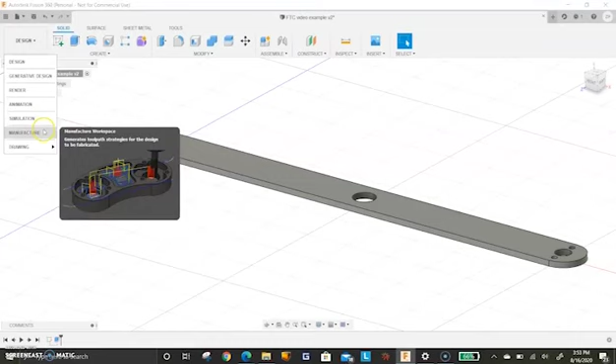Okay, so here in Fusion 360, I have this relatively simple part I've modeled up, and I want to make it on a CNC machine. So to do that, I will first go to Manufacture and add a setup. This setup is basically what contains what kind of machine you're using, the stock information, your work coordinate system, and what you're actually making, which is this model.

So for the work coordinate system, this is pretty important because this orients every operation in the same way that your CNC machine will see it. So for most CNC machines, Z is up, and Y and X can change between machines, but it doesn't usually. And so just keep those the same, and you can mess around if you feel like something's wrong.

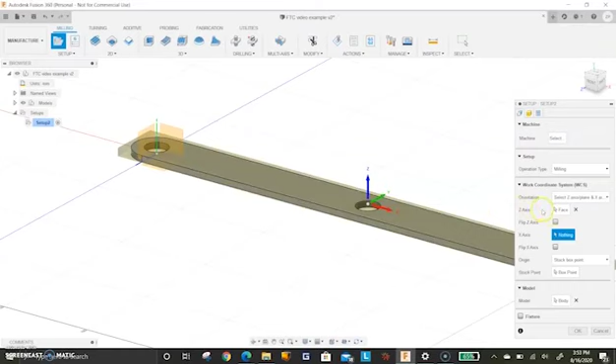And here in stock, you can set stock offsets, or you can change whether it's a cylinder, a relative box, or a fixed size. I like to use relative size for simple parts like this, and change the top offset to 0. And for the purposes of this video, I will turn the sides offset to just a little higher so we can see what's going on a little better, but I like to also keep that at 0.

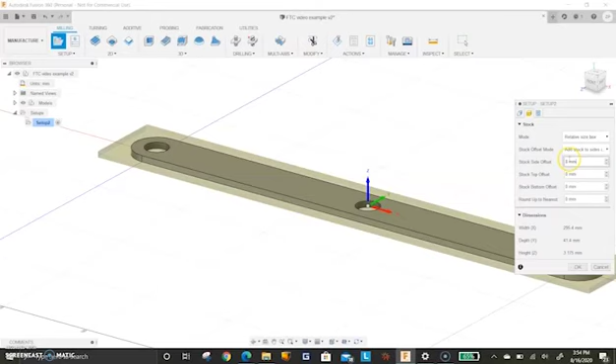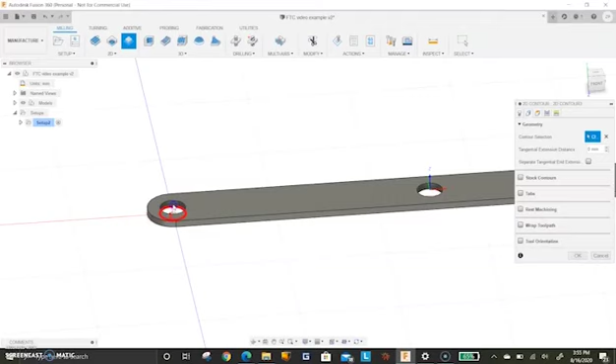So now that we have our setup, we need to add an operation. And I think the best place to start is with these holes. To make these holes, one option would be to just add a contour here, which would, well, here, let me grab my tool real quick. I'm using an 1/8 inch end mill for this video.

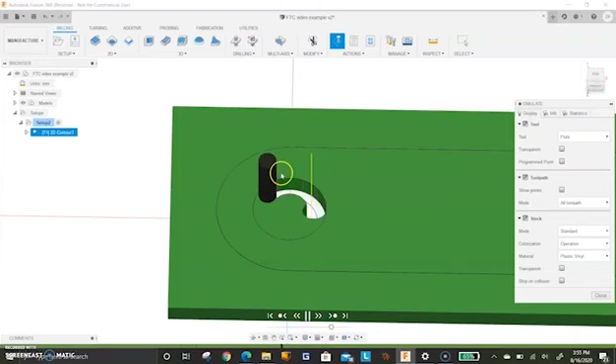As you can see, it leaves this chunk of material in the middle here, which is not ideal because that can be released, that'll be loose in there, so it could get caught between your cutter and the wall of your part and either break the cutter or send your part flying across the room, which neither of those things you want.

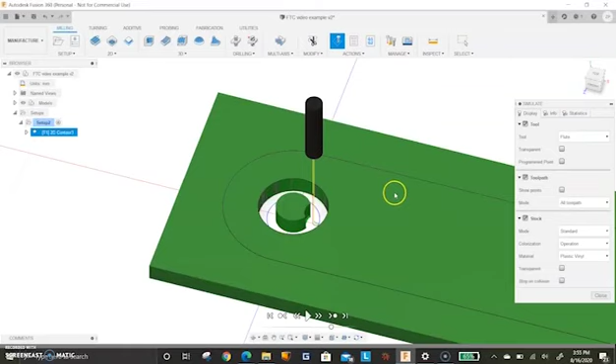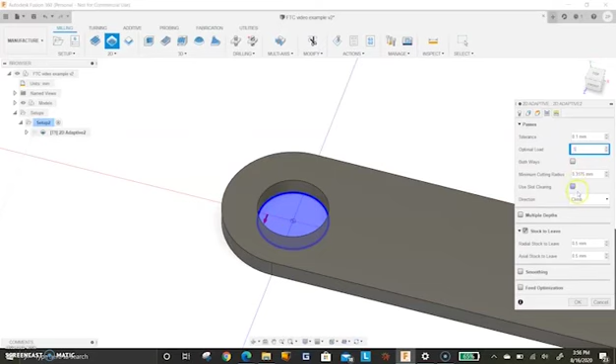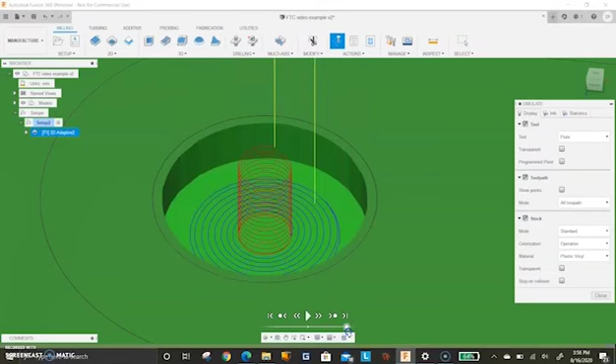So an easy way to get around that, and a pretty effective way too, would be to use an adaptive clear, a 2D adaptive, and select that again, and what that'll do is that'll start from the middle and open up the part rather than just cutting out the shape you want. So that's that.

And a little bit more on that is optimal load, which is how wide the cutter will always be cutting. It will never exceed the optimal load, which is very useful for hobby machines where you're wanting to push the limits of your machine, but if you go too far above that, you're either going to break your tool or something else, which would not end up very well. So this optimal load keeps things very consistent and predictable. So for hobby machines, I found that 0.5 millimeter optimal load is pretty good for an 1/8 inch tool.

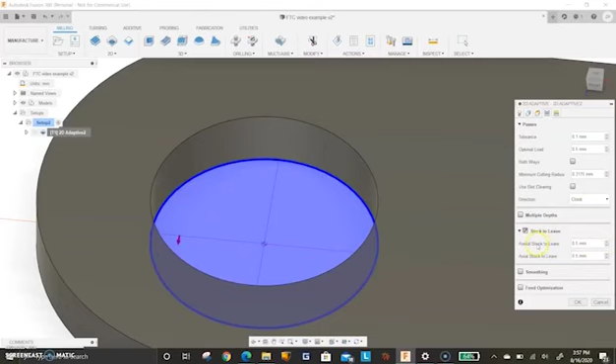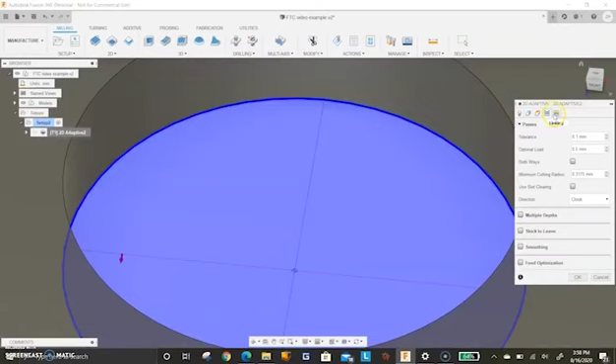And stock to leave is what it sounds like. It's dictating how much stock is being left. With a 0.5 radial stock to leave, that'll add 0.5 millimeters this way on the edge, so it'll make a smaller circle than what it should. So for this, I'll turn that off. Stock to leave is useful for finishing passes to pretty up the surface finish or get a more tight tolerance, but I won't go into that for now.

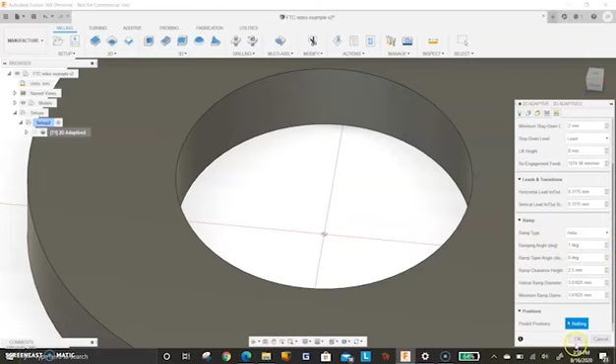And here in linking, there's the ramp option, which is just extremely useful because it avoids plunging your end mill into the work, and it is pretty controllable. So what I like to do is I set it to 1 degree instead of 2 degrees because it's a little shallower. It'll take a little longer, but it's a lot easier on your tool.

And on top of that, we have feed rate. I like to have the cutting feed rate around 400 millimeters per minute. So I'll just type in 400 millimeters. And then for ramp feed rate, I like to have a little bit lower, just because it has more cutter engagement. So 300 for that, 400 for that. Whatever machine you're on, you're gonna have to experiment with that just to see what works best on your machine. Well, I found a pretty good number is 400.

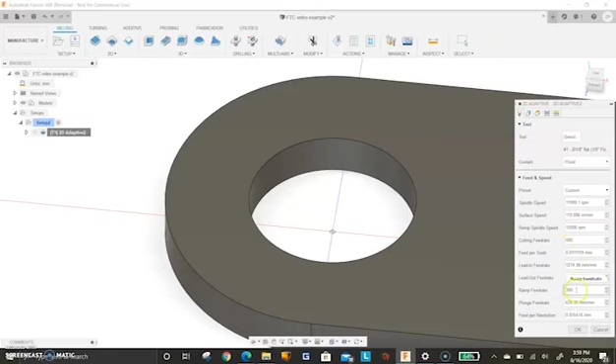So there's that, our first operation. And just to finish that off, we'll go back in again and select the rest of our holes. And that finishes them all off.

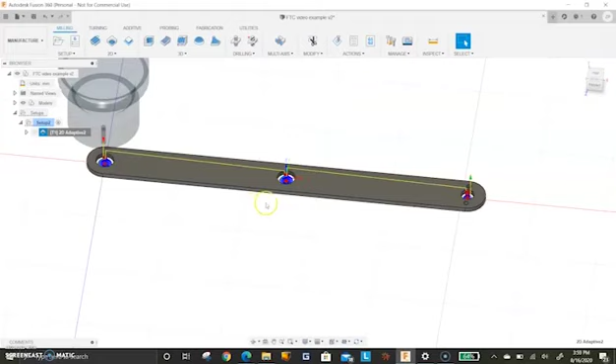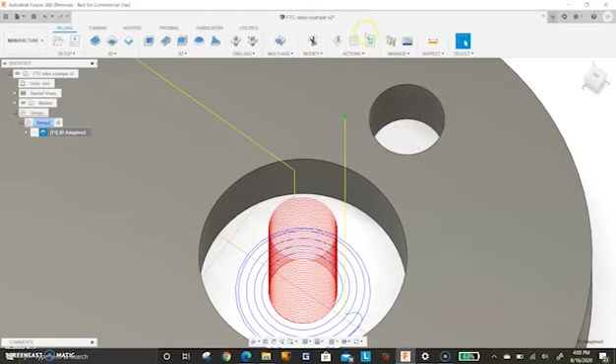Next up, we have these little holes, which are a little tough to do with an adaptive. It's not impossible, but it's a little impractical because once you're down in there, it's such a small hole. It's so close to the diameter of the tool that all the chips you're making will just get packed in there and break your tool. So I found it's better to do a boring operation.

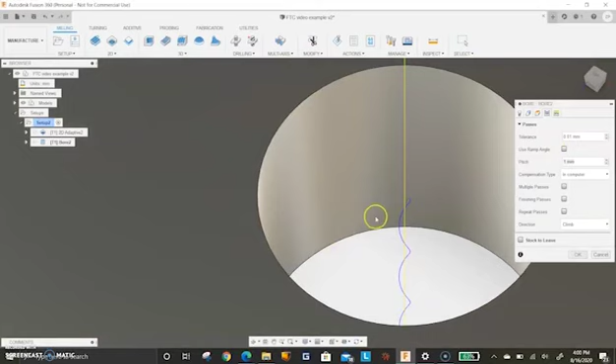It'll do very small diameter holes without plunging the end mill by making a small helix downwards, and that's a little too steep for an 1/8 inch end mill, I think, so I'll set that to 0.2 instead, which looks pretty good to me. That'll send your tool spiraling down in there instead of plunging it.

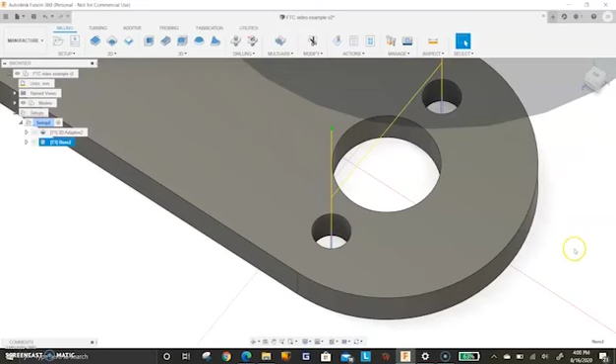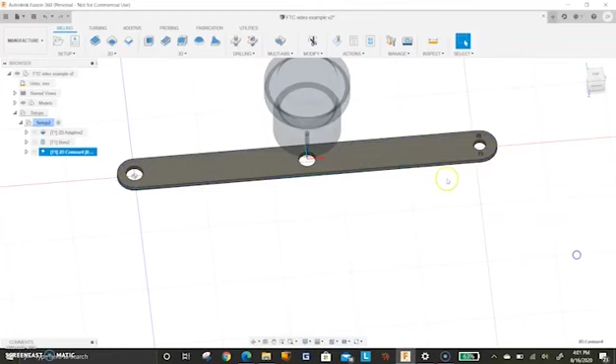And then finally, we have to cut out the actual part, the outline. So the most commonly used toolpath for that would be a contour, which is what I showed over here, but on the outside of the part. So what that'll do is just cut around the outside.

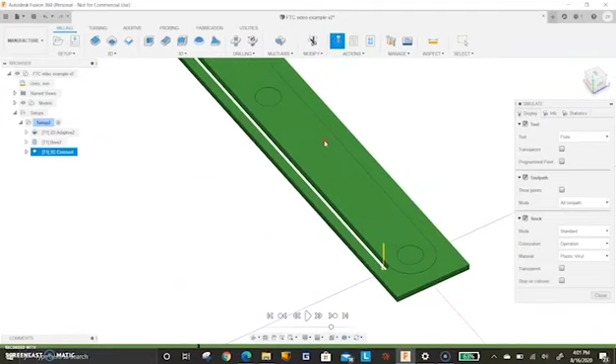This, though, is not ideal. First of all, it plunged straight into the part, or straight into the stock, which is not good. It'll probably break your end mill. Well, definitely will. And it's got full engagement on the cutter, and it's at a full depth of cut, which will also definitely break your tool. So to get around that,

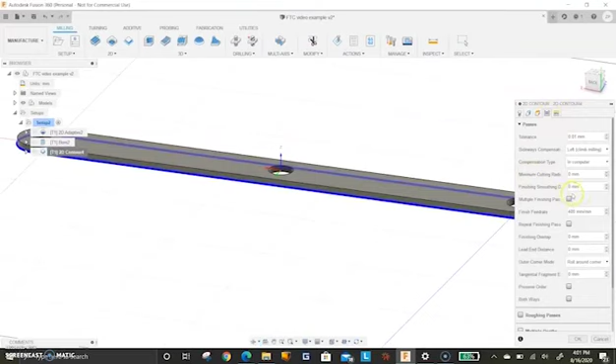we'll add a few more passes. No, not roughing passes, multiple depths. And I'll set that to 0.2 millimeters. That'll leave very small step downs. That'll be easier on the cutter and your machine.

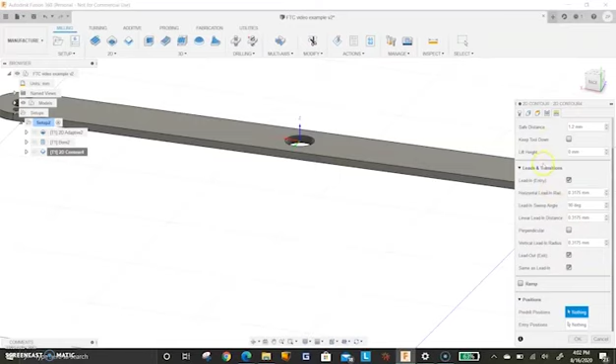And to avoid plunging, we'll turn on ramp again and turn this angle down again. So now we have a lot more passes and our tool ramps into the part. That's what this red line means. It's ramping into the part.

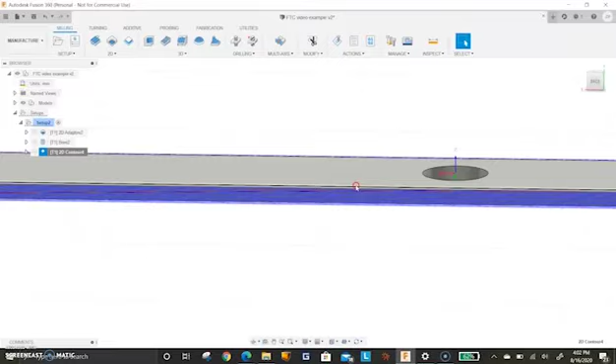There's another way to do this, which is a little bit more optimal, because right now, if I go to machining time, that's a 25-minute operation, which is not ideal. So for now, I'll suppress this. That'll just clear the tool path and keep it from generating again.

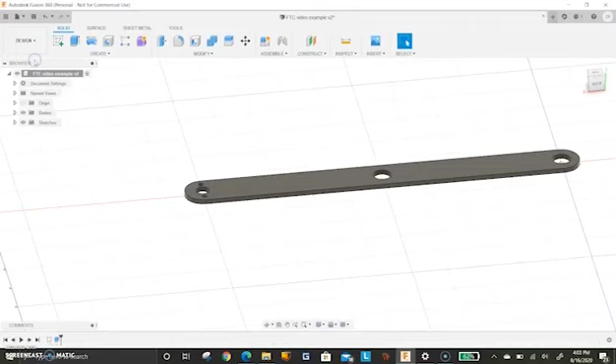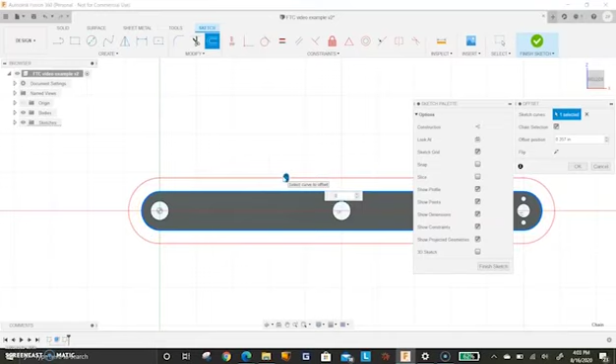And I found a neat trick is to go into design again, and create a new sketch at the bottom of your part or around whatever contour you're machining. And then use an offset and offset it a bit more than the width of your tool, but for this example I'll just do 0.25 and finish that. So now we have an extra outline around the part that we can go into manufacture again. Now that I changed the part, I have to redo this, so I'll just generate these again.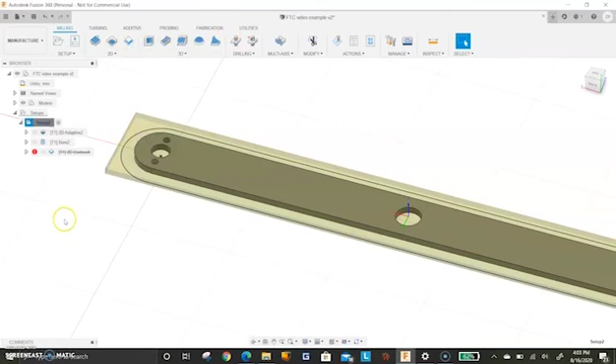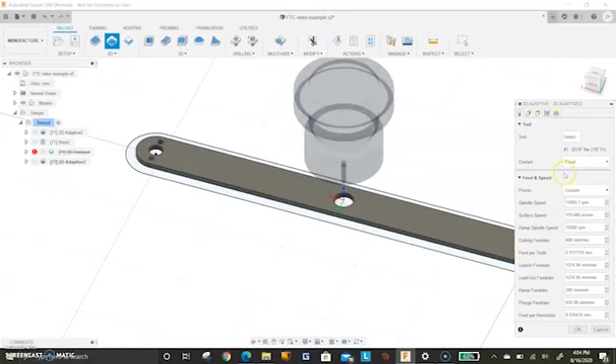And now we'll use adaptive clearing again to rough around the outside of this part. And we're going to use the same optimal load as before, 0.5. Same speeds, they're all saved in here. Same cutter. And that doesn't look right. That's cutting the inside of the part.

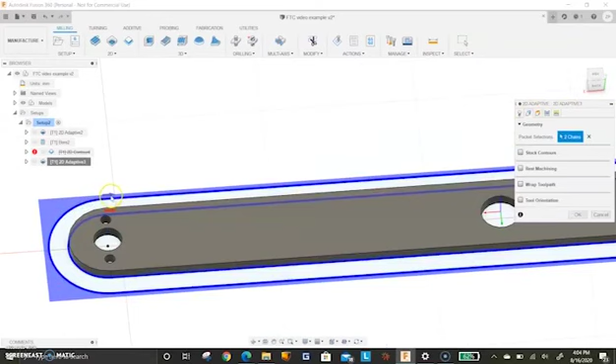So how to fix that is to go back into edit again. And over here in geometry, flip the direction of these arrows. So now that does this portion instead of the inside and the outside. Wait for that to generate.

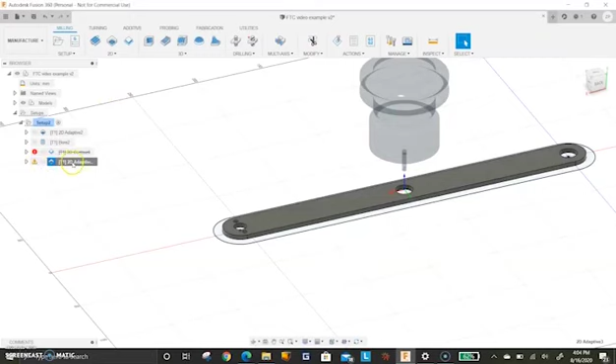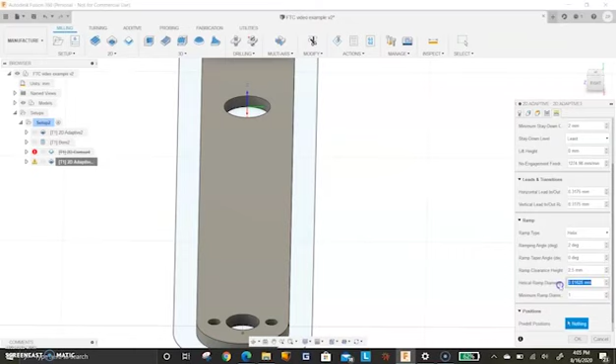Okay, so we got an error, which is normal for this because we don't have enough space for our tool to ramp into the part because our diameter is set larger than this area I've allocated for this operation. So to solve this, I'll just change this to say 1 millimeter. Let's see if that works a little better. Yep, now it's able to ramp down into the part,

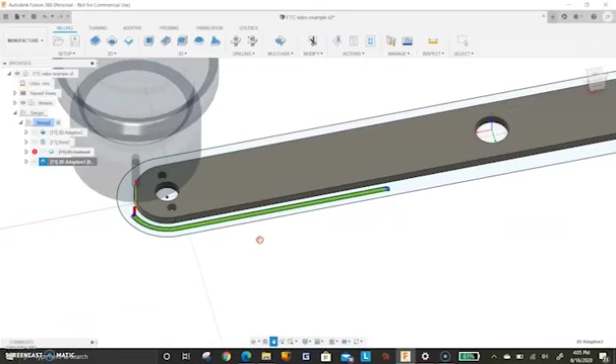and as you can see, instead of going one outline around the part, it's taking smaller bites from the stock at once to just keep that optimal load and just be a little easier on your cutter. Also, it's faster. It will take a long time to generate depending on what computer you have, but I'll just let this generate.

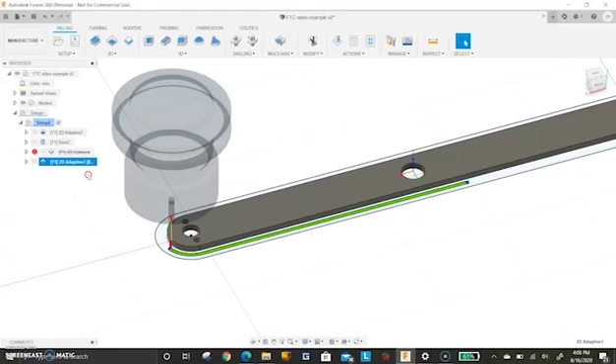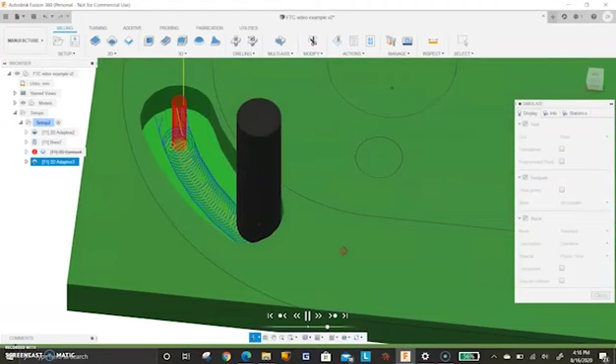Okay, now that it's generated, we can see if I go into simulation, it spirals down into the part like normal, and it just takes small bites away from the part. This is a lot better on your tool and your machine. You don't need as much rigidity or power. You don't need as much horsepower in your spindle.

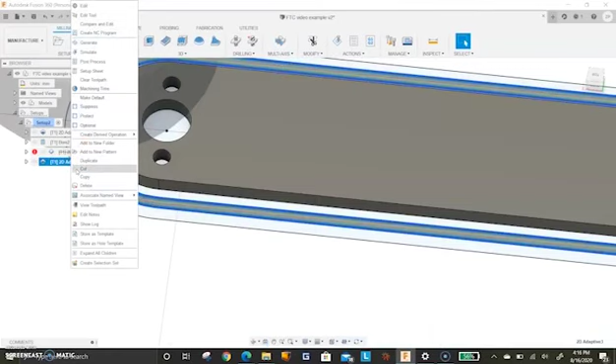And it's shorter too. If I go over here and hit machining time, well, maybe I was wrong. Let me see. Well, I guess it's maybe not shorter in this case, but I know it's been shorter in some cases that I've had to use this, but it's an alternative to contours if you're having trouble with that.

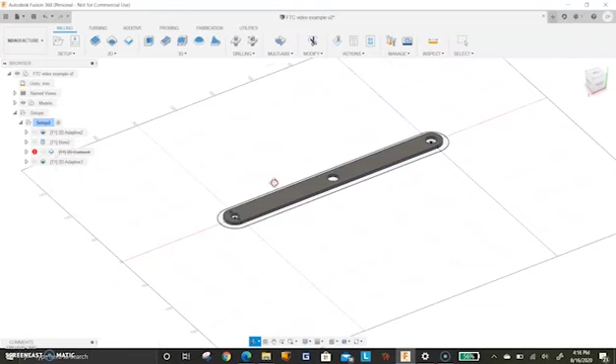So I think that's about it for the CAM side of things. Oh wait, you'll need to post-process this so that it'll convert all of these into G-code that your machine can use. So my machine runs off of Grbl, so I post with the Grbl post processor.

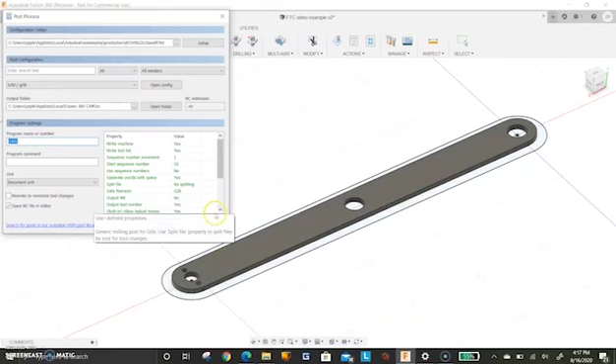And you can type in your program name and just post it. And that'll save as whatever you've typed in here or whatever you want to save it as. You can change the name later. But I think that's about it for CAM.